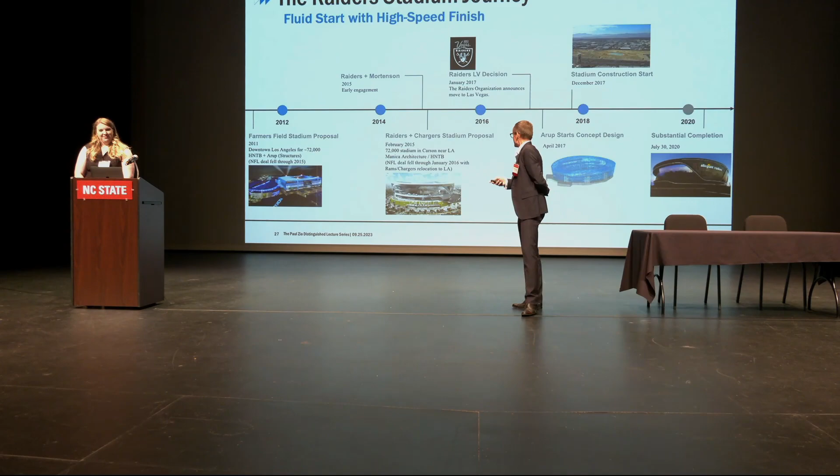A stadium isn't actually built in these 40 months, right? There is a long journey to it, and the journey of the Raiders in Las Vegas actually started in 2011 with the Farmers Field Stadium proposal, which was supposed to be built in downtown Los Angeles, also with 72,000. And that was the first time we got involved with HNTB. And that deal actually fell through in 2015. And then the next steps actually started when Mortenson got involved, Ellen.

Yeah, so there was another idea to move the Raiders to a shared facility with the Chargers, what is now SoFi Stadium, shared between the Rams and the Chargers. And the Raiders organization actually reached out to Mortenson. At the time, we were constructing US Bank Stadium in Minneapolis, Minnesota. And they said, hey, you're our builder of choice. We want you.

At the time, we respectfully declined the opportunity because we just didn't have the capacity. We had a ton of team members engaged in Minneapolis to finish US Bank. We were right in the trenches of the ballpark down in Atlanta for the Braves. And then we were getting ready to start Chase Center, the Golden State Warriors arena out in San Francisco. So the timing just didn't work out. The Raiders were pretty disappointed, but they understood and walked away. And that actually started a beautiful partnership between Mortenson and the Raiders.

And so in 2017, the decision was made, the parcel of land became available, and the NFL owners all met and voted, I believe 31-1, that the Raiders were allowed to move to Las Vegas. And a condition of that move was that the stadium had to be open for the 2020 season, so it had to be ready for preseason games in August of 2020. Fortunately for the Raiders and for Mortenson, our capacity was looking a lot better, and so the partnership was able to continue out in Las Vegas.

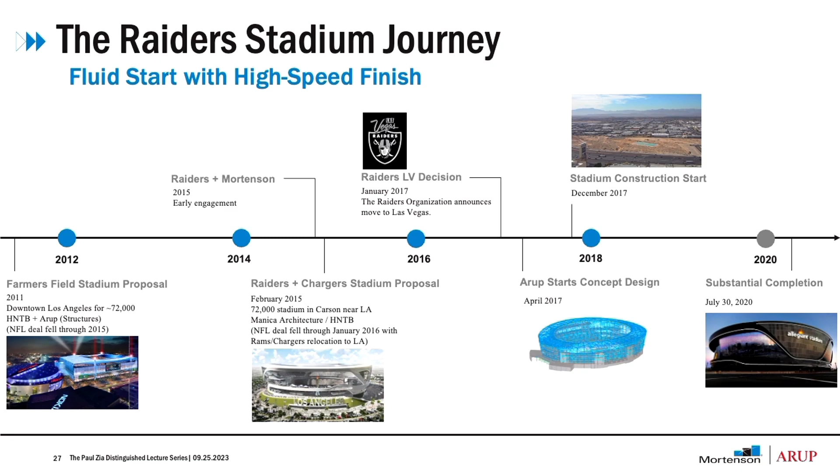All right, so now we'll move on to how did we deliver the stadium? So obviously a stadium of that size, with that fast of a pace, takes a huge team. And so the ownership group was a partnership between the state of Nevada and the Raiders. So that was the Las Vegas Stadco. And then Manica was the concept architect. So Manica came up with all the beautiful renderings that the Raiders organization fell in love with.

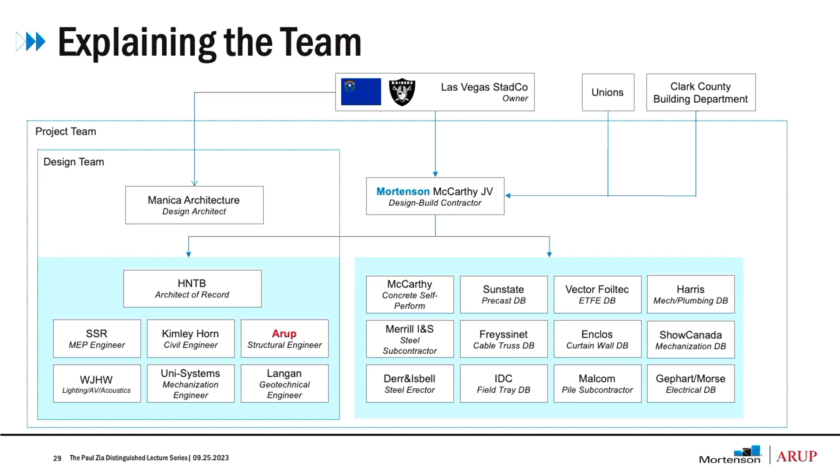Mortenson McCarthy, it was a joint venture, we were hired. And it was a design build delivery structure. So we had the architect and subconsultants under our contract, as well as all of our trade partners to construct the project. HNTB was the architect of record. You can see the other folks on the screen, most notably for today's discussion, Arup, the structural engineer. So we worked hand in hand with Arup, really from that April timeframe all the way through until the very end of construction. And then our trade partners are in the other blue box you can see. So we self-performed concrete on that project.

So a project of this size can only be done with one team, and we needed to be clear on one goal to get to the success. What that means is everything had to be subordinate to these goals, and to understand the background better, you need to understand football is the only revenue stream for the Raiders. So there was either a stadium on July 30th, 2020, or there was no stadium at all.

So that meant simply, yes, you can come up with a scheme, you can come up with an architecture, you can come up with a design, a schedule, anything, but if it doesn't meet the schedule, if it can't be built, if it can't be permitted, if it can't be designed within these 40 months, then it's not the right scheme. You don't have a project. And you can see the design schedule is extremely compressed, with only 12 months from start to 100% CD, and then also we had to work closely with the permitting agency.

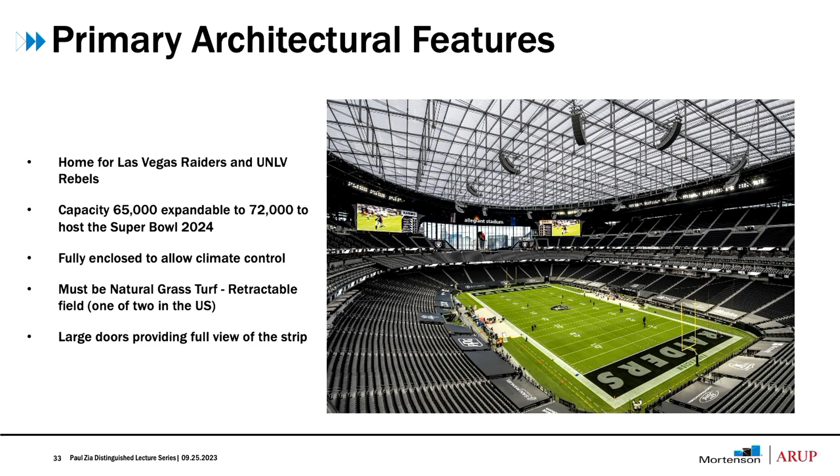And then the other big must-have were the lanai doors, as they were called during construction. So a series of 4 operable and 2 fixed doors that were 50 feet wide and 80 feet tall, that when the weather was nice, allowed you to open up to get just beautiful views of the strip. And so that was another must-have. So Frank and the team rolled up their sleeves and got to work.

Okay, so how did we make the stadium designable? So, the usual suspects, starting off: design repetition, typical floors, a limited number of connection types. Also, maybe I should mention here, we as Arup, as structural engineer of record on the West Coast, we designed all the connections from 100% CD. I guess it's different than what is typically done here.

So limiting the number of connections also helps, because it limits your design time. And then a large number of the connections were also capacity designed, and that is also a balance between efficiency in the design versus making it efficient to build and efficient for changes. Because if something changes, you have extra capacity in your connection. You don't have to redesign. You can make on-site changes quicker.

And then for people with seismic backgrounds, we selected a balanced seismic force resisting system, SFRS, with an R equals 3. Some of you may think, oh, R equals 3, why did you choose something relatively low, meaning you have fairly high design forces? The reason is because we were able to get around seismic requirements on the members and the connection design.

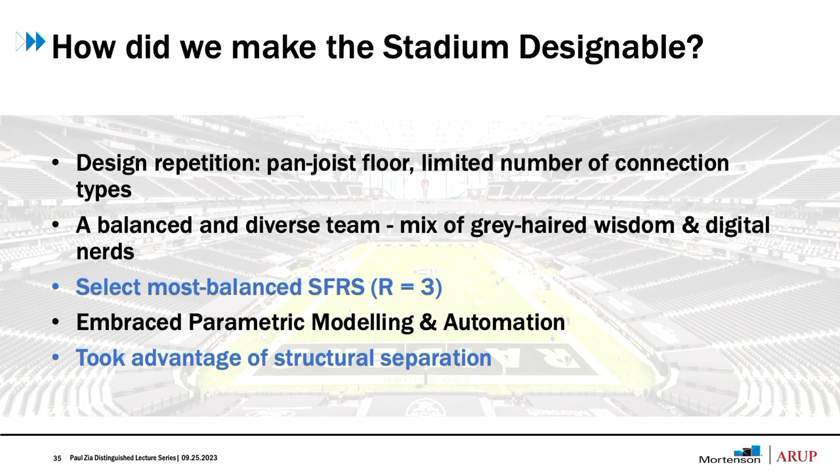And then, structural separation. There were numerous iterations in collaboration with Mortenson McCarthy in the beginning. How are we going to separate it? Where are the movement joints going to be? And that also helped us with the design process, because as you can imagine, if you need to overlap design, you need to be analyzing structures separately at the same time.

And then you have 4 separate bowl structures with double structure movement joints. So what that means is, you have a concrete plinth which is connected only at the foundation level, and then you have a movement joint through the steel and through the lower concrete structure.

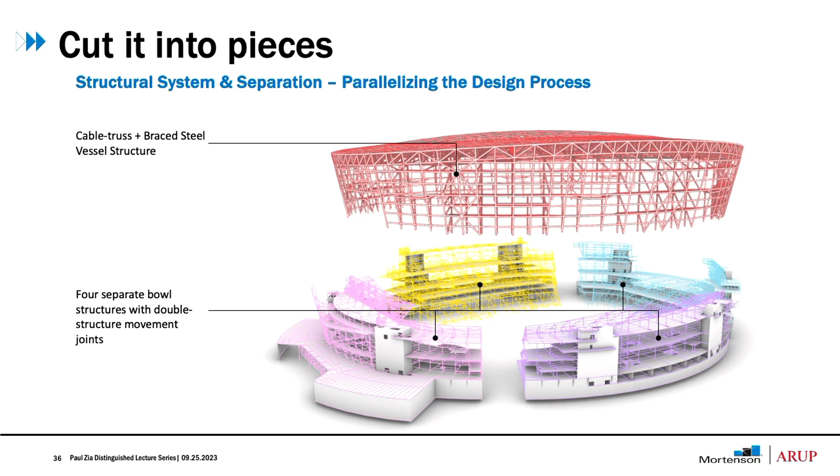Okay, so as I already mentioned, we used a steel system not specifically detailed for seismic resistance. That doesn't mean anything bad, right? It just means you need to assume a higher seismic force. You're only allowed to assume a certain level of ductility, as opposed to, let's say, an R=8 system.

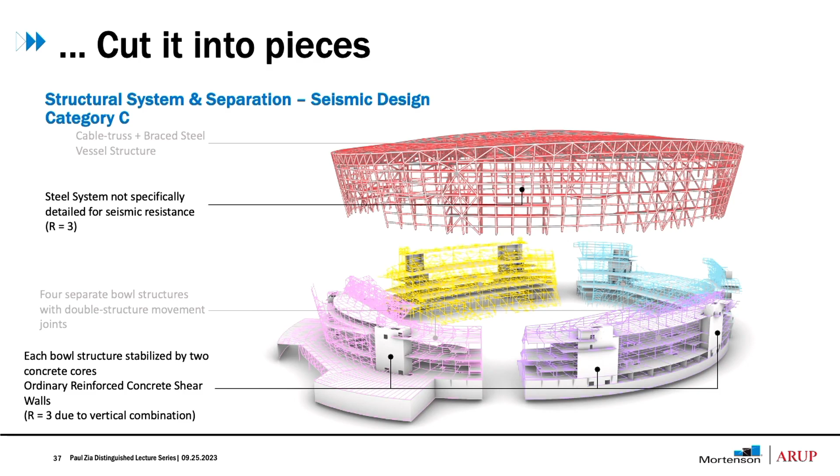And then because we had a vertical combination, these reinforced concrete cores were designed as ordinary reinforced concrete shear walls, also R=3. And because they were ordinary, here too we were able to reduce the detailing requirements to an acceptable, constructible level.

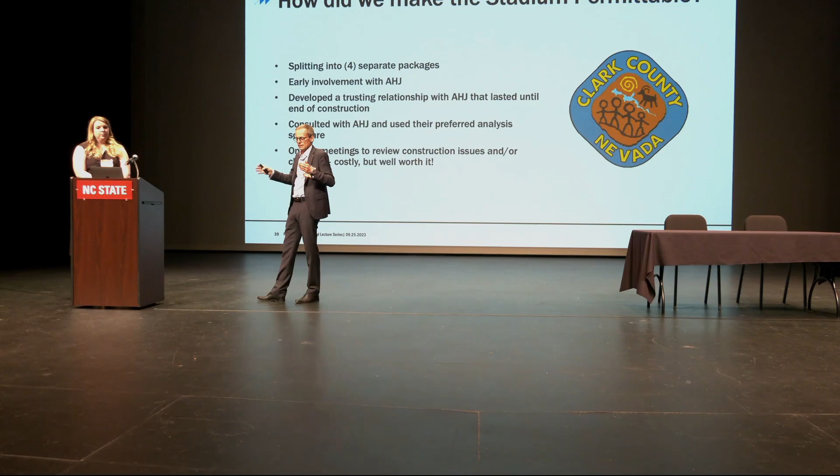Okay, so I was already talking about the importance of parallelizing the different work streams, and that also meant we had to work with the local authority, Clark County, to help them get it permitted in a time frame acceptable to our client. As we mentioned in the very beginning, you can't finish the design and then start constructing. You need to start constructing significantly earlier. So we needed not just 1, but 4

separate packages. And it's not that you just walk in and tell Clark County, hey, we're coming tomorrow and giving you a set of plans. It was a long process. In probably one of the first meetings we spoke to them and got their feedback and input on how we can do this the quickest way possible. And that actually helped us build a very good working relationship with them.

Because if you paid close attention, you probably noticed that the ultimate owner is the State of Nevada, which, in some sense, is sitting above Clark County, right? So on one hand they're the owner, and on the other hand they're giving you a permit.

So there were these competing interests. We're saying, hey, why does it take so long to review the structure? And on the other hand, you need to do a good job, you need to be diligent, it needs to be absolutely safe. And the other thing was, we are a large engineering company. We have our own software. We have our own way of doing things often. But that way of doing things often doesn't line up with how AHJs, like Clark County, do things.

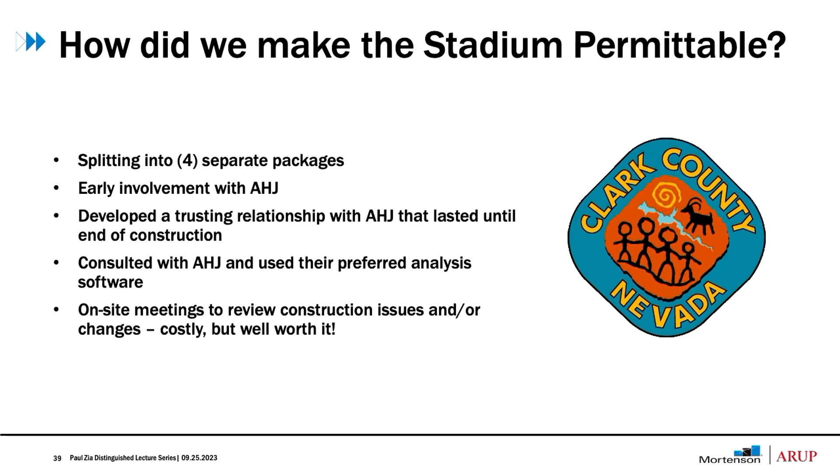So we asked them, how would you like us to submit the documents? What software would you like to have it in? And of course, they used the software which we didn't have or didn't use in the beginning, which meant we had to change horses, not halfway through, but early on. But that also helped them to verify and take a look at our models in software familiar to them, and that helped build the trust with them. And then regular on-site meetings during the construction was another key point I wanted to add here.

Okay. Yes, so how did we divide the permits up? We divided the permits up in the way that made sense for construction, but probably not in the way that Frank would have preferred from a design standpoint. So our first permit package was our foundations package. We got that package and got going right away. While we were doing foundations, Frank and the team were working on our lower and upper concrete bowl. And so at any given time, I think we were about 3 months ahead from design to construction.

So not a ton of time for design change error, AHJs deciding they wanted something different. So we as a team made the decision to have the first 2 levels of the building be constructed in cast-in-place concrete, because that would give us time for our steel detailing and procurement. And so once we got to our main concourse level, which is the level most folks walk in on at Allegiant, we switched to an all steel structure, and the steel superstructure was the last permit package that we had.

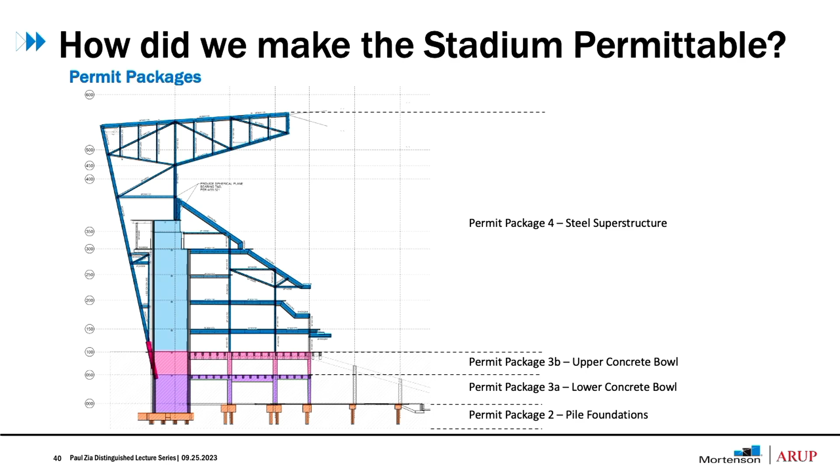Okay, and how did we make it constructible? We had to focus on engaging the trade partners that could perform with us as early as possible to make sure that we were hand in hand with our subject matter experts to make the best decisions for the project. So we really tried to make decisions backed by data, either cost or schedule. We kept those customer absolutes I talked about earlier at the forefront of our mind, but there were a lot of decisions that had to get made very quickly.

I would say the pro and challenge of design build is the contractor having the design team under our umbrella. It allows a ton more collaboration for those types of decisions, because the owner isn't as involved necessarily, as long as you're achieving the right design outcome for them. But it does offer opportunity for a little bit more disagreement or back and forth there in the beginning.

We embraced common tools. We'll have a whole section on this, but it was really critical to come up with a BIM execution strategy that everybody could live with and thrive in. And so we used Tekla for steel, and then converted to a Revit, Navisworks, Revizto kind of combo at the follow-on trades. And we utilized continuous quantity tracking. We really tried hard where we could to get a repetitive design so that our folks in the field could get good at a few things and repeat and drive up productivity and limit the surprises.

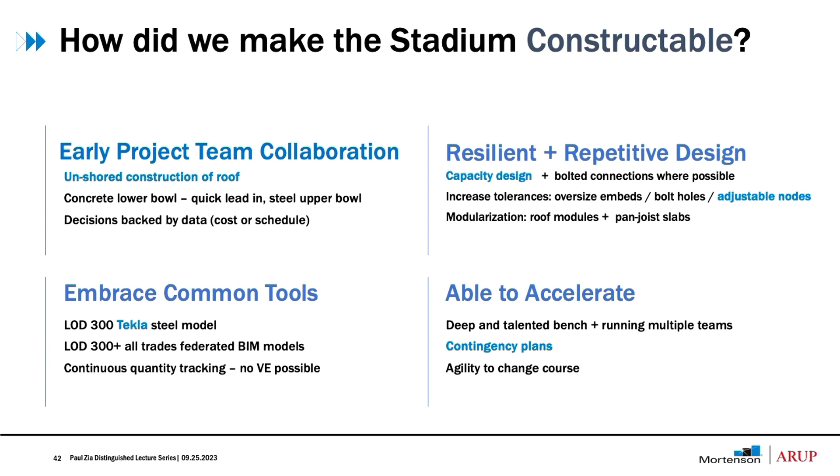By using a shared Tekla model, we were able to cut significant time out of the schedule. But also this one, no VE possible, right? If you look at a normal project, you do design, and your cost estimator or the contractor which is on board does some cost estimating, comes back two weeks later and says, oh, it's too much. And then you go back to the drawing board and change things. That wasn't possible, because it was almost like a train; you can't change lanes. You only had one direction to go.

So that's why we had continuous quantity tracking, which meant that we pulled out steel tonnages from our documentation models on a daily basis and plotted these on a graph. It also gave us an inherent quality assurance process, because if there was suddenly a spike, either there was a big change, or if there wasn't a big change, there was an error somewhere. By doing that, we were able to stay on track and avoid any VE. Okay.

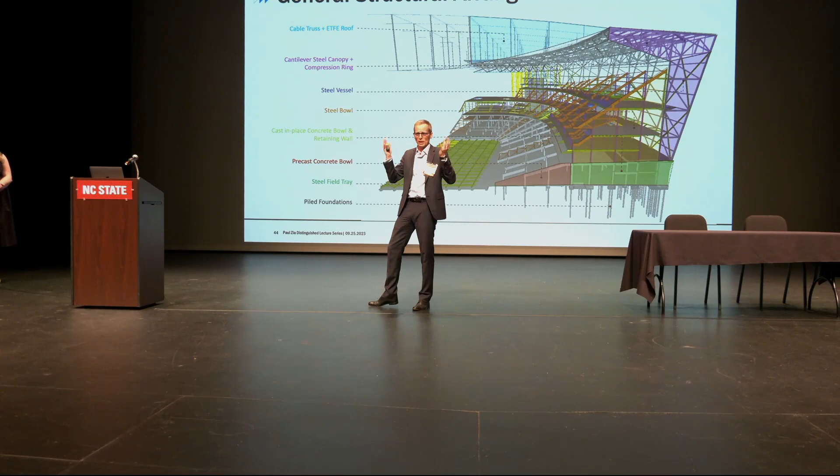So the general structural arrangement. The roof is built up of a cable truss and an ETFE roof, which sits just above the cable truss, which spans between a cantilevered steel canopy, which cantilevers from the back and forms a compression ring. It's kind of an eggshell thing. Sometimes it's hard to imagine why this thing is under compression. Just think of a tennis racket: you put some strings in between, you pull, and you see this thing is actually in compression.

And then what we call the steel vessel on the outside, which formed the skin structure, the braced frame structure, which is also the steel bowl. And then we have the cast-in-place concrete bowl and the retaining wall, the precast concrete bowl, and then the field tray and pile foundations.

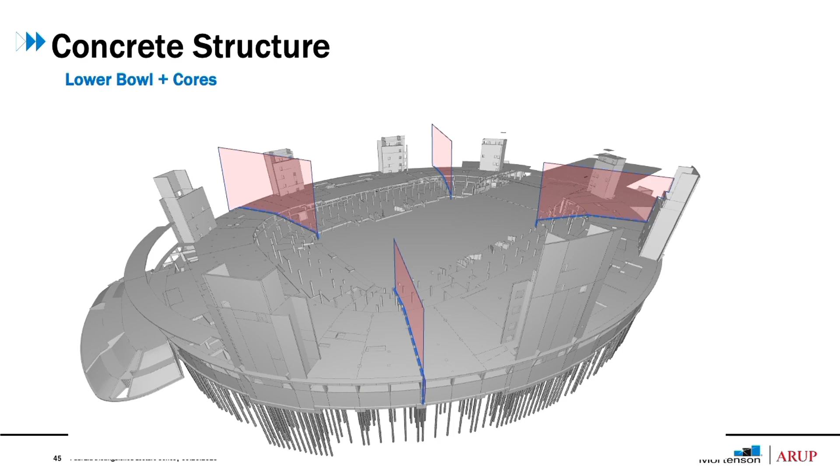Okay, so now let's talk about the lower bowl and the concrete cores. This is the 3D Revit concrete model, and what you see here in red and blue are the movement joints in between them. You can see each segment has two concrete cores to provide the stability system for the bowl steel structure.

Okay, so foundations. It's a piled foundation. The ground is actually quite good. However, from an excavation perspective it is difficult, because most sites in Las Vegas feature a super hard caliche layer, and depending on where you are in Las Vegas, you are not able to excavate it with mechanical equipment anymore. So excavation had to start early, and it was done with explosives. Was it on a daily basis, Ellen, when you blasted this out? So it had to be blasted out.

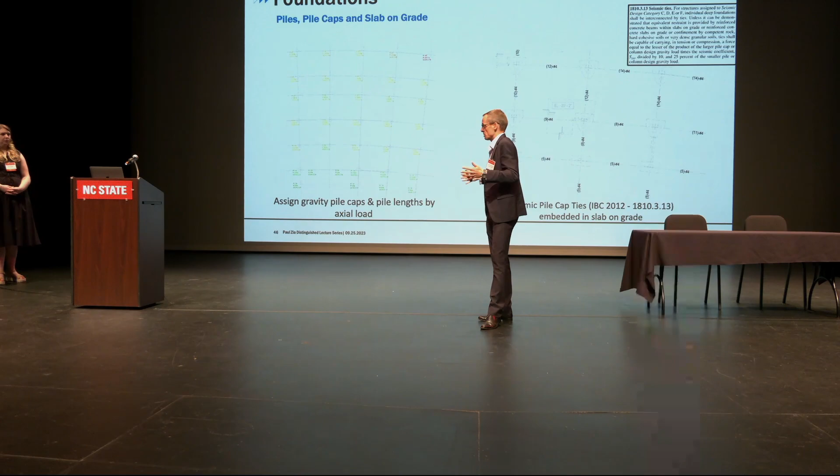Shortly after, once we received the permit for the foundations, we put in piles, and these were auger cast piles. Simply because of the scale, the number of piles we had, auger cast piles are just qualitatively the better pile, and through the large number you get good repetition, and that's why it's typically the most efficient pile system for such a structure.

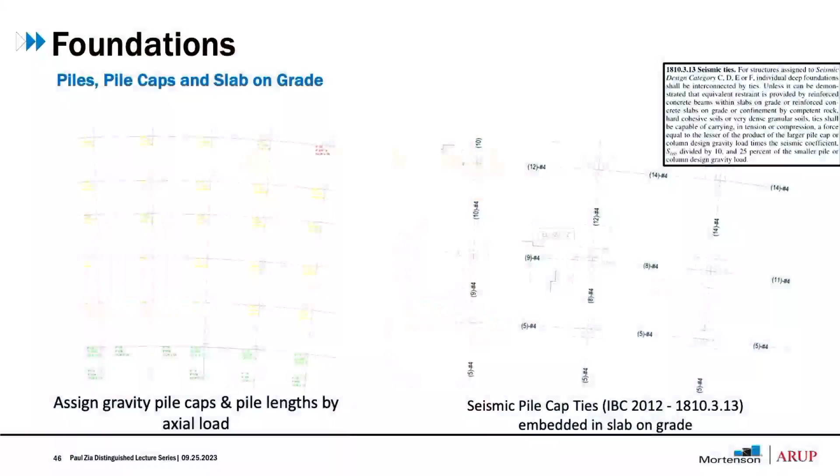One other thing was, and I don't know if we wanted to get greedy or just try to optimize it, we said, okay, we do a test pile at each segment, and based on the capacity of the test pile, we may adjust the number of piles. Which meant we still had to adjust the foundations. As you can imagine, your testing is not that far ahead, and you still need to go through county approvals and other things, so it was quite stressful and very difficult when the values didn't quite come up. So in hindsight it was maybe not the best idea. We should have maybe just started with the values of the first test pile.

But one thing I wanted to show here, and you will see this through the entire presentation, are outputs from our design, and it's not analysis software. These are custom-written tools which help us to visualize design data and track and control DCRs and so forth.

Because imagine piling was going on whilst we were still designing the building, right? So we continuously had to check the pile forces, that we do not exceed what's already in the ground. And then on the right-hand side, just want to make the point, wherever we could and we were allowed by code, we were using the slab on grade to tie these together for code.

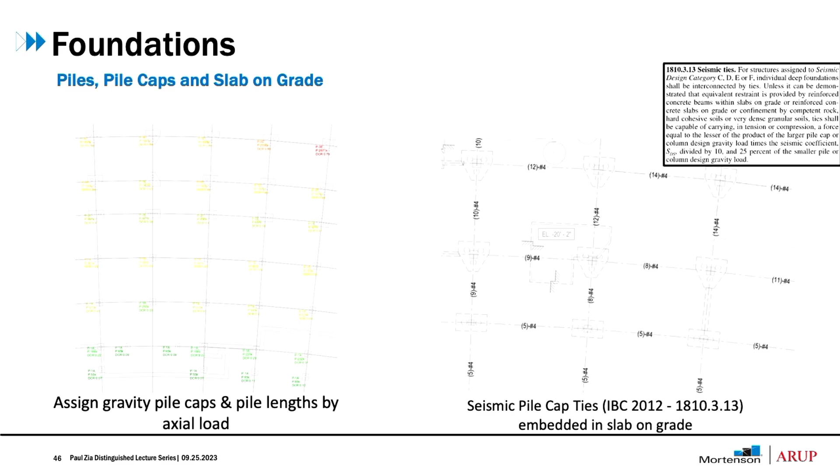And common practice is to use the maximum column force at the maximum location and put the same reinforcing everywhere. But then you are super conservative. We used scripts, and within 2 days, 1 day to calculate it out, another day to do QA and other things, we were able to optimize the reinforcing in the slab down.

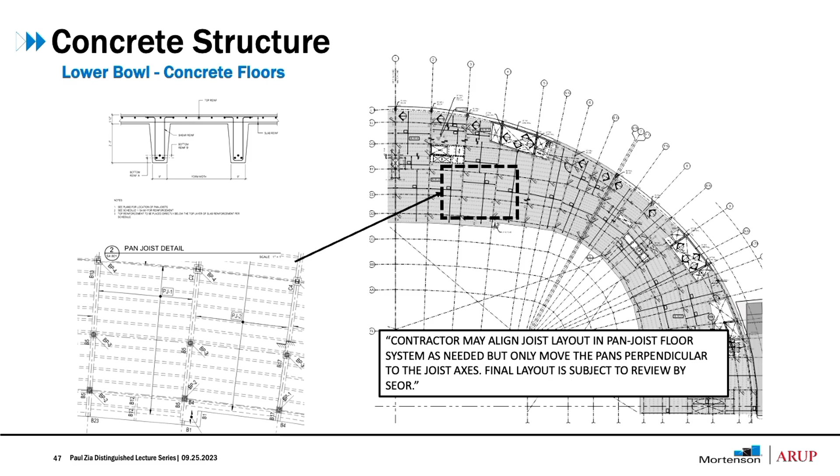Okay, so this is the lower bowl structure, the concrete floors, in collaboration with Ellen's team, who self-performed the concrete. It was cast-in-place double T slabs, and this is just an example. But as you can see, we try to give the contractor as much flexibility as possible to allow them to adjust it wherever needed, so we can reach the maximum efficiency. Right?

So there was no steel cast into the concrete, and that's how we sized the concrete wall as well. So we had these bars, and then we had some confinement reinforcing around it, and it was fairly narrow columns for seismic conditions, right? And that was also done because we knew that we don't want to pull the steel procurement process forward, because who has a W14 by 700 or whatever the size was laying around? Not a lot of people, right?

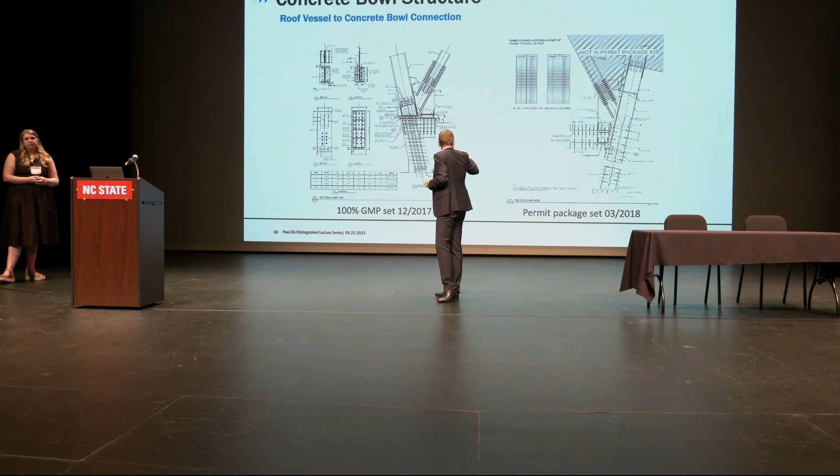So, but when the permit package, just after, maybe a month or so later, a new steel contractor came on board, and as the story goes, they had these columns laying around. And so in a moment of weakness, we said yeah, great idea, let's use the column and bring it into the concrete and cast it in, right?

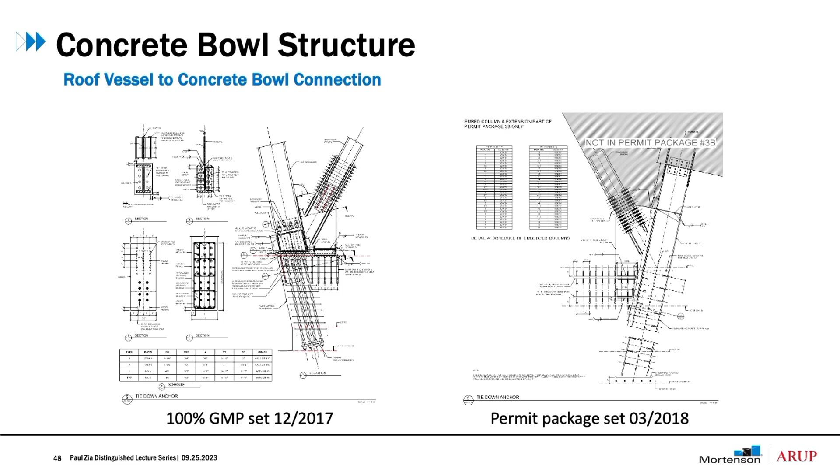In hindsight, it wasn't a great decision because now we couldn't change the wall thickness anymore. And then we struggled really hard to get the concrete in there, and we had to bring the rebar through the steel, and it took us a lot of 3D modeling of that connection to actually achieve what we wanted to achieve. So I guess the lesson learned here is, think it through before you make a decision, right, on this one.

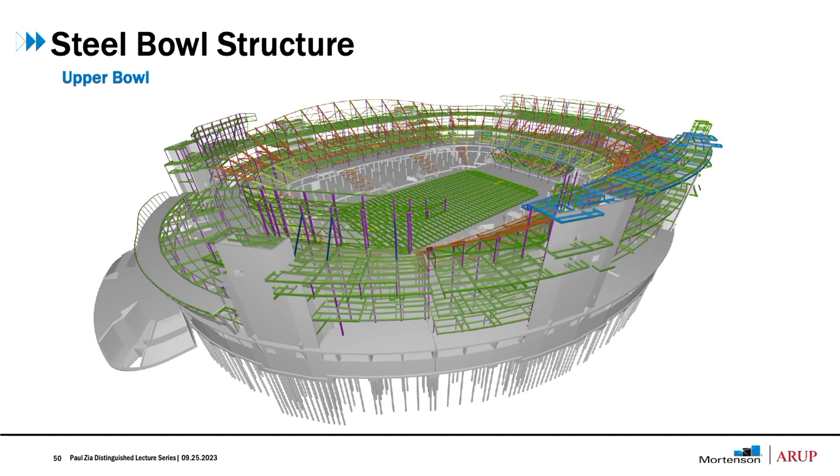Okay, so upper bowl structure. So, as mentioned, this is a steel structure, which is supported laterally by these ordinary concrete shear walls, as you can see. So fairly standard. You can also see some of these, actually 3 scoreboards, which was a problem in itself, because as usual, scoreboards are done last, but you needed to have the supports in, you needed to have a structure in, you needed to have some steel in, and then when Mortenson said go, we had to design it very, very quickly.

Okay, so this is the steel bowl structure. So there were 3 main concourse levels, and then this one here, which you see in this, I guess, salmon color, is a steel composite framing, which created the diaphragm for the horizontal elements, which tied them back to the concrete cores. And those were lightweight concrete, just to lower the foundation loads.

But now this is an interesting and very important detail, as you can see. The raker beams are steel, but then the terraces were precast. So if you want to save money and make it structurally most efficient, you would use these precast panels as a diaphragm. And it's often done, but the problem then is you need a temporary system to stabilize your steel during construction, which you then have to remove later on.

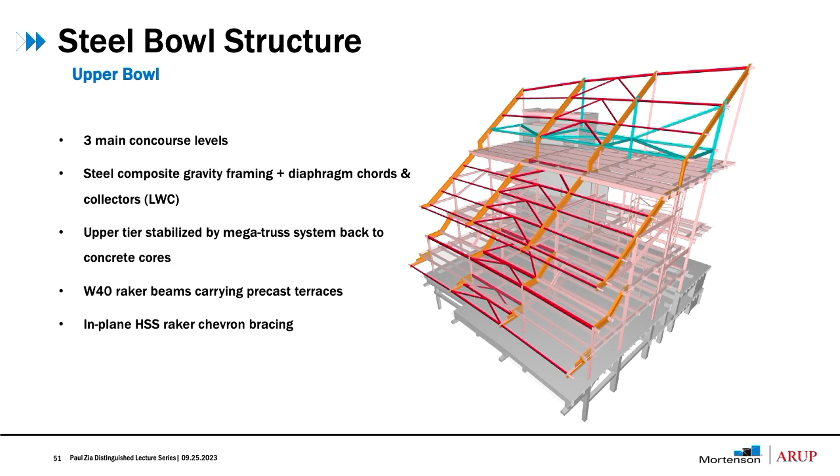And typically your connection to the precast is more complicated and needs to be done afterwards. So by putting these in, you spend more money on the permanent steel, but ultimately you speed up your process and ultimately save money, and that's why we chose it.

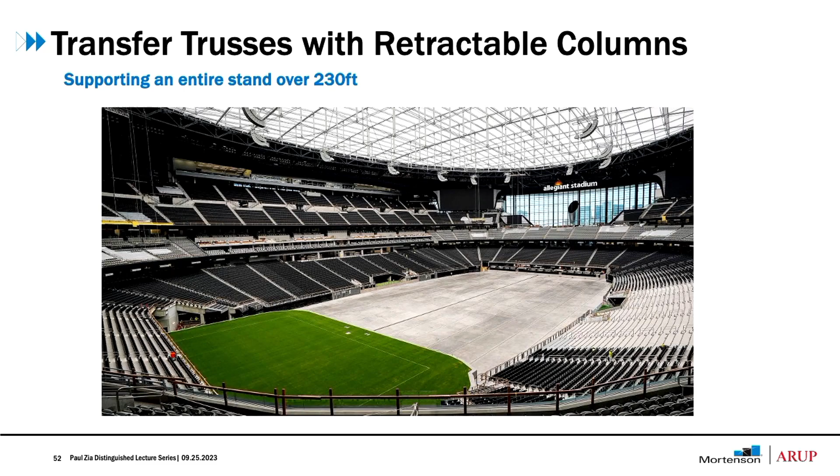Okay, so then you see the grass retractable field on its way out, and we needed a 230 foot opening, 60 foot tall, and some people see these columns here. They had to go away, of course, because when the field runs through, you can't have any columns.

So what we've done was, we wrote our basis of design, and then we spoke to Clark County and said, no problem. When the columns are not there, there aren't any people on it, so zero live load, likely. And then Clark County said, how sure are you that there are no loads on it, no people on it? And then they made us design for it.

So the answer then was, okay, we put these columns in, make them retractable, and actually also wrote them an operations manual to make sure that, number one, when the columns are down, the field cannot be rolled out, of course. Number two is the stands have to be completely empty when you fold them up. And then number three is just in case, for whatever reason, you don't have the columns down and people are in there.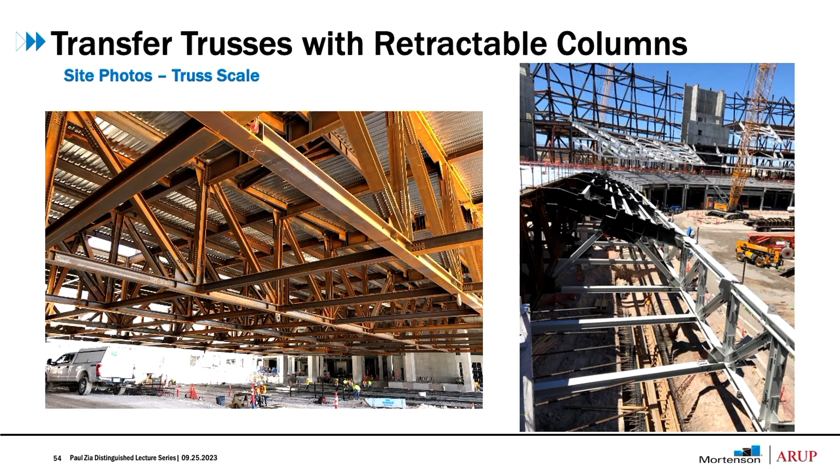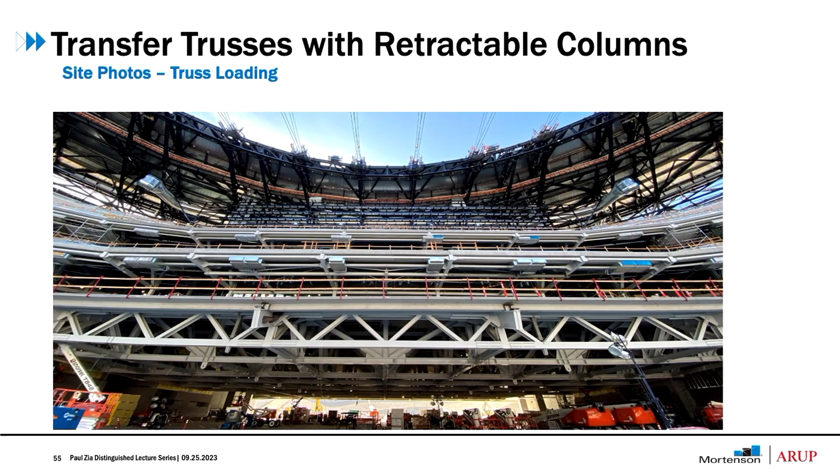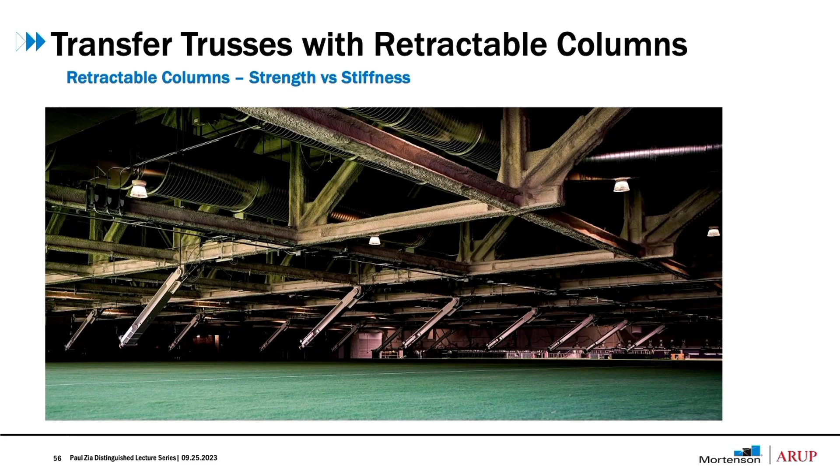Yeah, and then I don't know if you can make out these little brackets. This is where the retractable columns attach to. Okay, and this is how the retractable columns look halfway up, and then you can also see here there's a hydraulic jack, which, once they're down, of course not when the field is there, engages the truss into place.

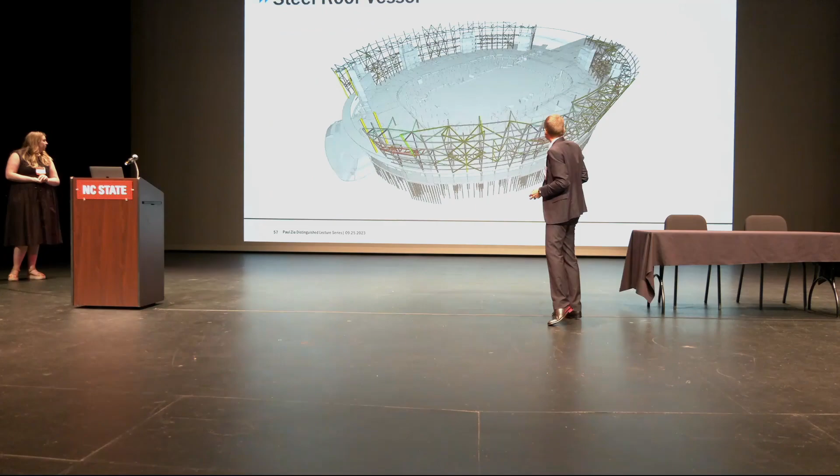Okay, so the vessel structure, as you can see, the braced frame structure, stability system. So now with the full canopy on top, and then you can see the spans over the openings here and there.

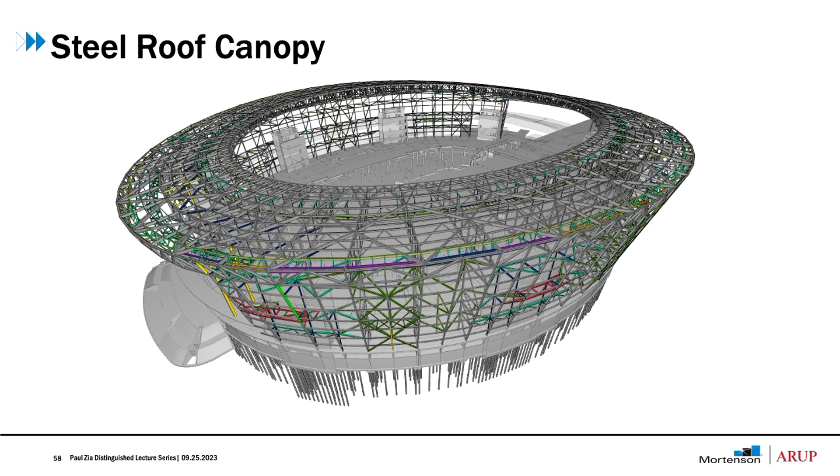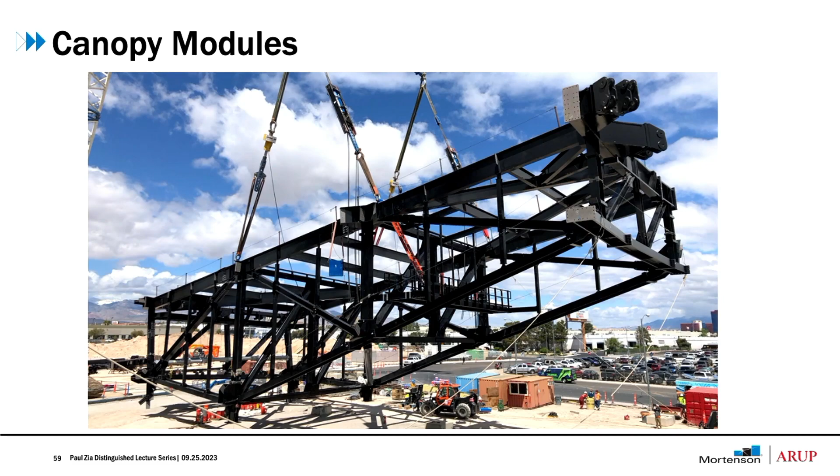And then, of course, erection. There was no time for supported erection, because whilst Mortenson erected the roof, they were doing other things in the bowl. So everything had to be done cantilevered. So besides the permanent condition, the entire design construction team had to do an erection model to take into account the additional forces induced and the additional checks required for the temporary conditions.

And the concept was that alternating modules were erected, and then infill pieces were filled in. Okay, and then some images to that. You can see here one of these trusses being erected.

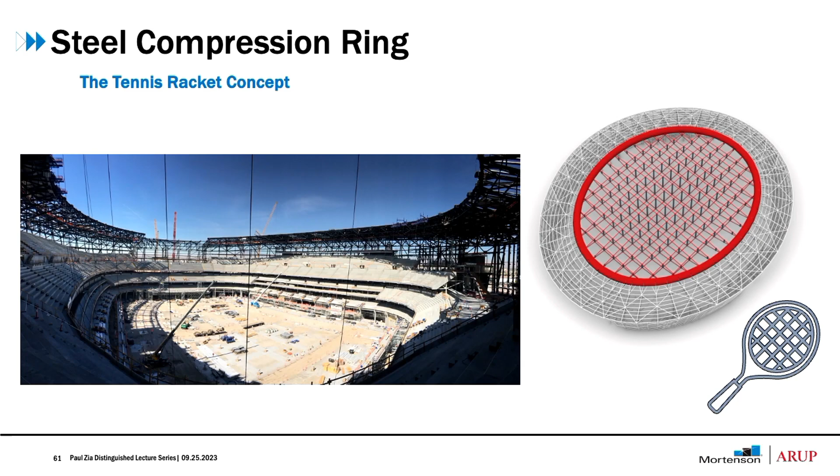Okay, so you have these spacers of different height, and by varying the height, you were able to create the geometry of the roof. And you can see double cables, top and bottom, in each direction.

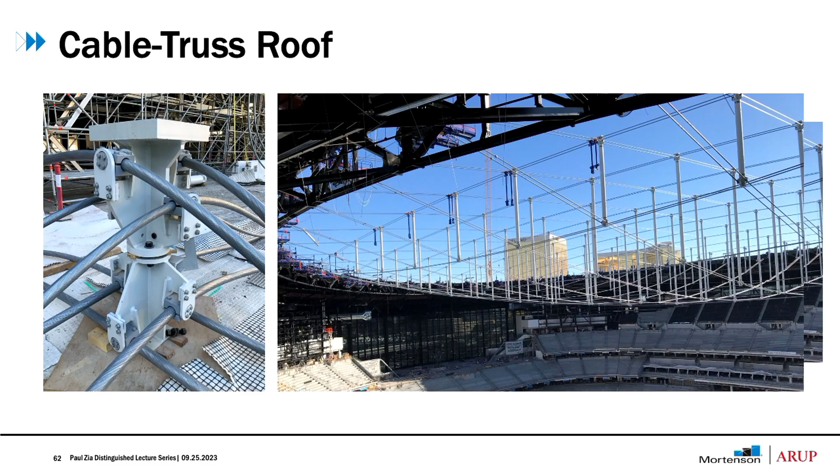Okay, so I really like this picture on the left because it shows you the scale. So this is Greg, one of the main designers of it. You can see how big this thing is, right? And then this is the top chord of the compression ring. This is the bottom chord of the compression ring, right? And then here, this is also something which we were very proud of.

So these cables, they're not small cables. They were like 4 inches in diameter. They're big, and they're cut to length. They come to site. You can't just say, hey, the compression ring doesn't fit quite, can you make them a few inches longer or shorter? It doesn't work like that. And typically what's done is actually 3 options.

Either you fabricate the compression ring to a much higher standard, and even if you did do that, you still are at the risk of having to adjust things on site. Second thing is you have turnbuckles in there, which you can adjust length, but often that's not wanted architecturally. And then we came up with this one because architects do not like other things in there.

And with this one, we were able to reduce the required tolerances of that compression ring and reduce the cost, but also give Mortenson McCarthy the flexibility to change things on site if things just didn't fit quite as much.

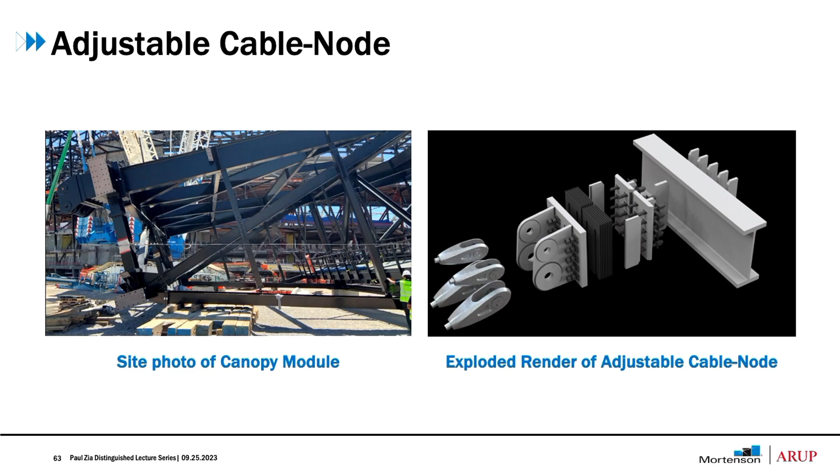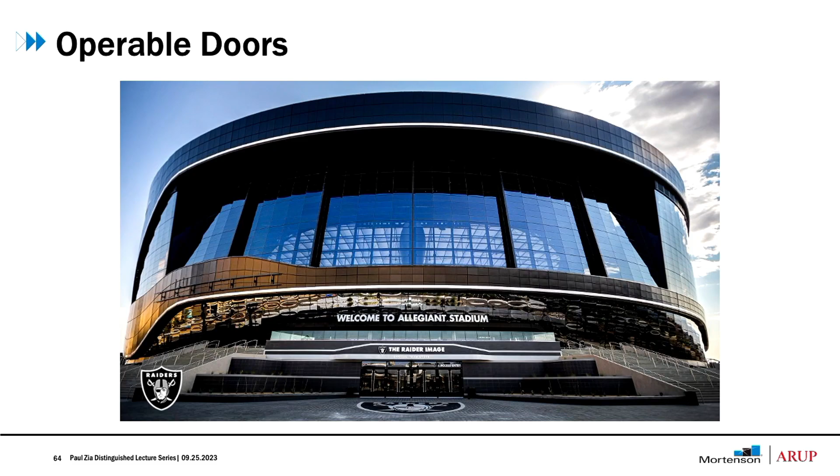Okay, operable doors. So the operable doors were actually installed by our curtain wall contractor. And so we had a very tight structural threshold with our crane. So pretty proud of these doors. We only had 5 inches clearance between the tip of the crane and the top of the door and structure. And so we were able to prefabricate these on the ground and then swing them into place. It all went fairly flawlessly.

They're electrically controlled. And so for the first time in my career, the very first time we pressed the on button, the doors actually opened. So we were very excited here, on a stadium where we had not very much time to troubleshoot errors.

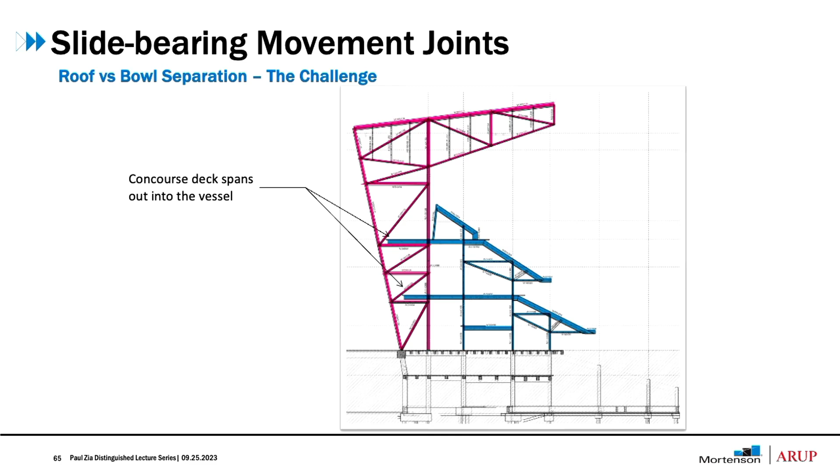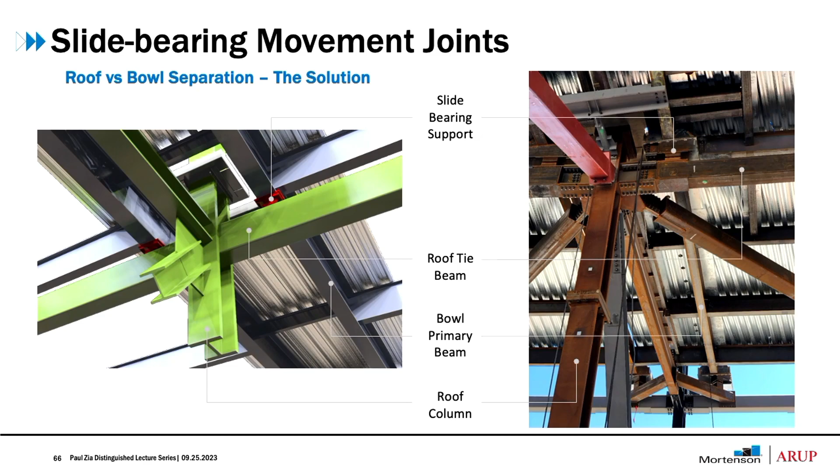Okay, so I think I mentioned there's the vessel structure, there's the internal structure, so they needed some slide bearing. And another thing we were really happy with: this is how we thought it's going to look, and this is how it actually ended up looking. Of course we didn't model all the connections in there, but you can see it's similar, right?

Okay, so normally when we give a presentation which is significantly more focused on structural and automation, we go into significantly more detail. But what we've used on this project is a database-driven approach, and what that means is we make sure everybody works with the same data. We pull out geometry information, design data, and pull it into a database.

So meaning, you have a database for your overall geometry from your Tekla model. It's pulled into a database that can then be pulled into the analysis software, and you can run the analysis with that. At the same time, you can pull out the analysis results into that database, and then use any software pretty much everybody knows to visualize things. And this is just an example.

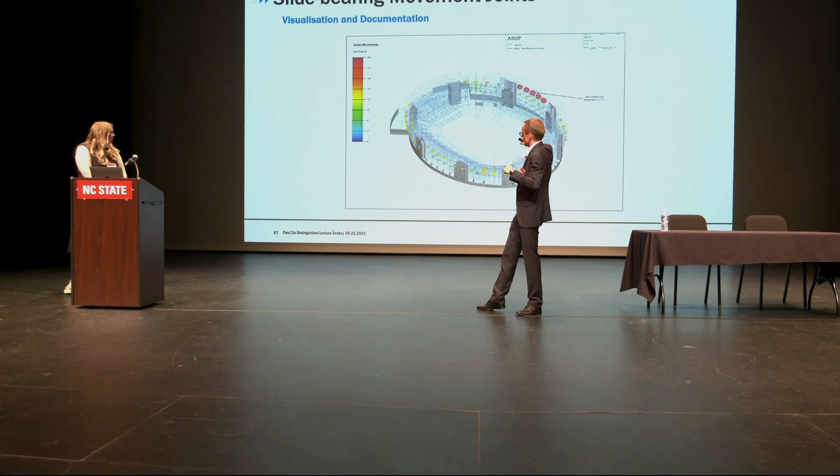For example, hey, show me the movement between these joints. And as you can see, these are actually 5 computer models pulled into one, which is difficult to do if you have 5 different models, sometimes at different stages. But this shows the power of this approach, right?

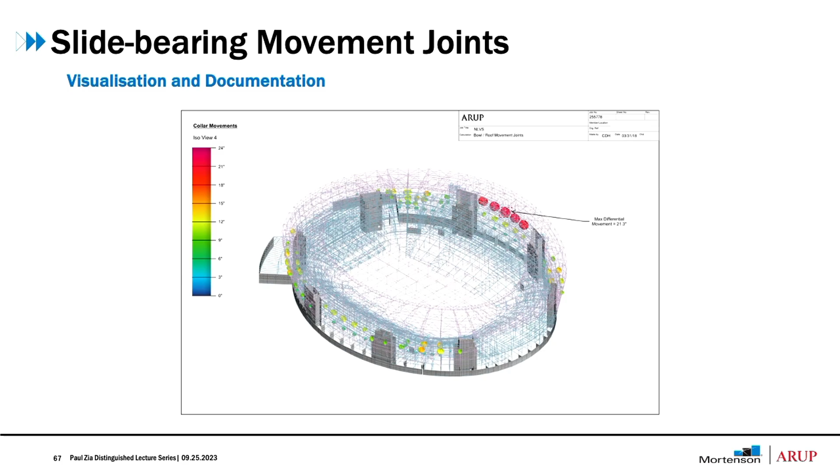Okay, digital design and BIM. So the next 20 minutes we're going to talk mainly about BIM. Digital design is a bit shortened just for the sake of time. But I think the BIM portion was probably the most critical thing on the project.

Okay, so the eternal question is, or was, I think we answered it, architect's or steel fabricator's software. So people in the industry are probably familiar with Autodesk Revit. It's the common program to document building structures these days, and it's a good tool for what it does. It's good for consultant coordination. It's good for concrete documentation, and it's great for interface with other disciplines.

On the other hand, there's a tool which is better for steel. And 99% of all steel contractors and detailers use a software called Tekla Structures, which is owned by Trimble. So at the time when we started this project, these two didn't really talk to each other well. So the question really was, okay, are we using the architect software for steel? Well, the architect told us, hey guys, you're using Revit, right?

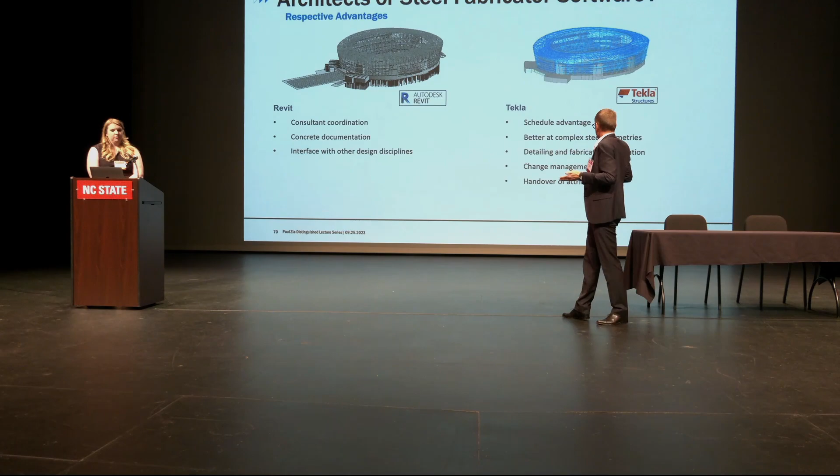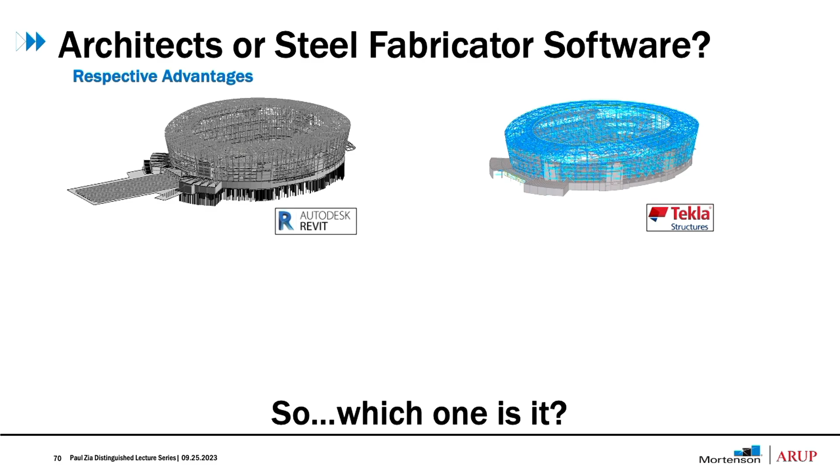So now the question is, what do you do for the coordination and documentation? The schedule is the answer, what I just told you. In order to make this work, what I showed you in the beginning of the process, we needed these 3 months. That was only possible by cutting out a 3-month model creation on the detailing side, and that's how we did it. We built a level of development 300 model in Tekla at Arup.

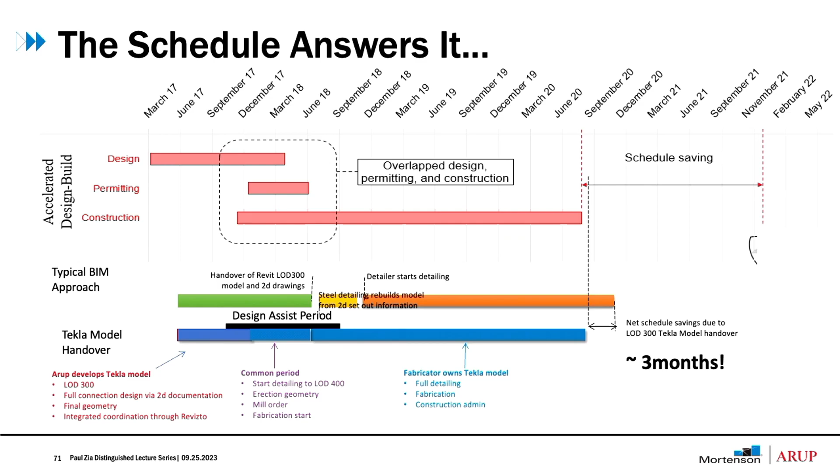And then we had a handover period where we sat with the steel contractor and discussed how do you want to have it built? Mill order, what do you want to have in the attributes, which data do you want to exchange and other things, and then we handed it over to the contractor, to the fabricator. And that saved 3 months, right?

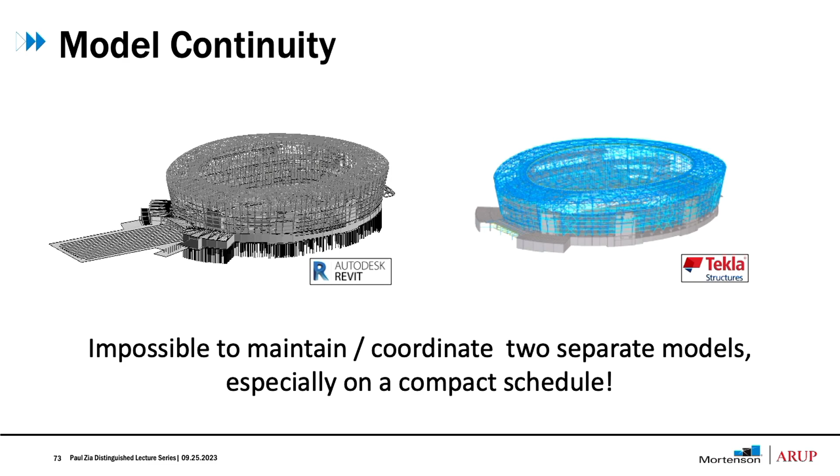But how did we deal with the coordination, the architectural side of things? It's impossible to maintain these 2 models, because it's just like, did you update it here? No, I forgot. Please, will you update? On such a compact schedule, it's just not possible. You have to go back to 2017; now it's 2023 and there are other tools out there which make them talk to each other. But it was fairly new at that time, and we had delivered projects with our approach before, and we wanted to make sure that what we have works and we can troubleshoot it ourselves.

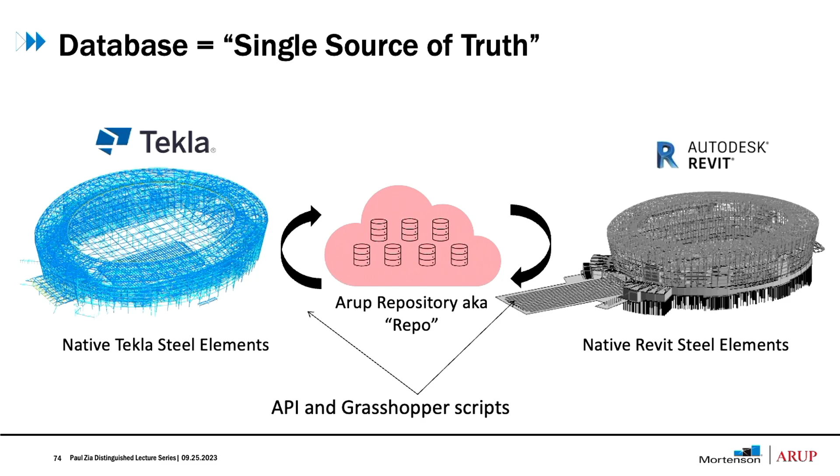So we used our tool, which we call Arup repository, aka repo, and it's very simple. You build something in Tekla. It's not simple, it's a stadium. And then you read it out into a database. That's the repo, with tools using API and Grasshopper scripts and other things. And that is what we like to call the single source of truth, the geometry. Then you use this to build a native Revit model out of this data. And because it's based on the same database, it's the same.

The architect did know that we were doing this, but they didn't see it, because they were seeing a complete and native Revit model. By doing that, we could give them the best of both worlds. We give the steel contractor the steel model and give the architect the coordination model.

All right, so Frank explained how the steel process went, and I'm going to attempt to summarize this graphic on the screen for how everyone else integrated into our BIM execution plan. We made the decision early on that Revit was going to be the platform for the project for everyone else. That's fairly common now, I would say. In 2017, it was not as common. By getting our trade partners on board early as they were drawing their content straight into Revit, the design team was able to sync in the cloud and pull our trade partner drawn content into what ultimately would be the construction documents.

So we were able to streamline that from what's typical, where the design team would draw the concept drawings and then the trade partner would go and recreate that in our construction modeling. So you can see the little Revit icon up there. And from Revit, every single day, we pushed to Navisworks.

And so Navisworks is the platform for clash detection. And so that's where our trade partners were managing models and seeing the clash reports. That's fairly standard in the industry, has been that way for years. But we introduced a follow-on piece at the Allegiant project, which is the use of Revizto. So Revizto at the time was an emerging technology, pretty widespread now.

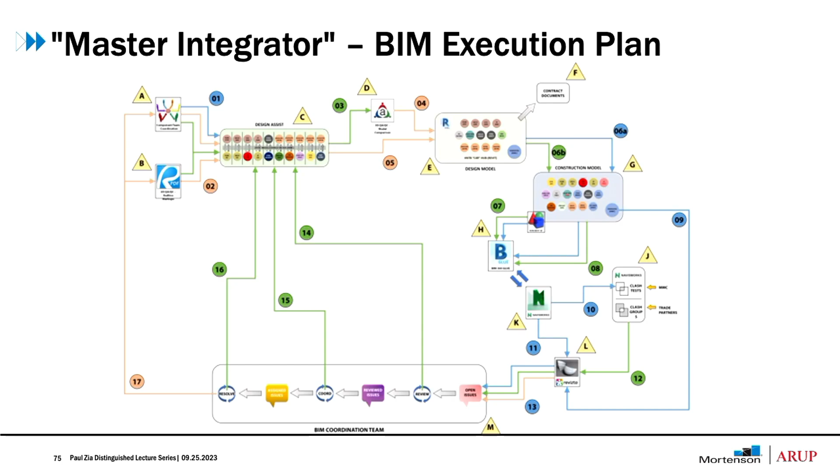And so this piece really just speaks to cutting out the waste. So we cut out the design team produced drawings from a non-structural standpoint by sharing all of our models up to the cloud. I want to say 2017 was really when the cloud was becoming widespread, and so now I think it's pretty common. Everybody probably uses it, but... Yep.

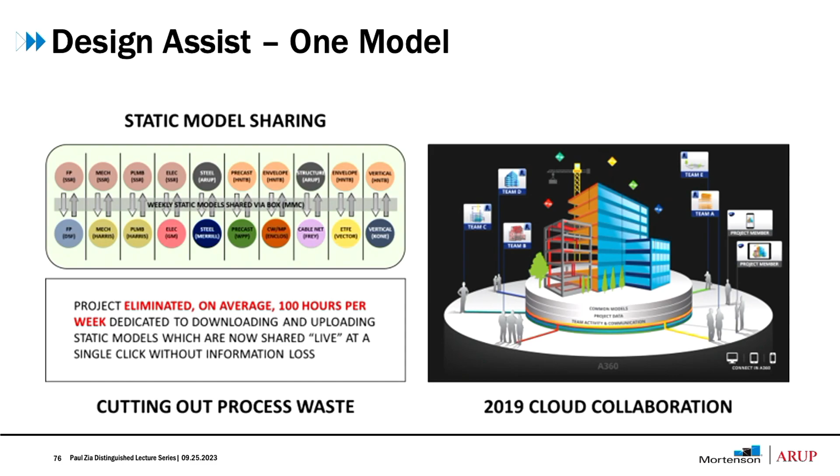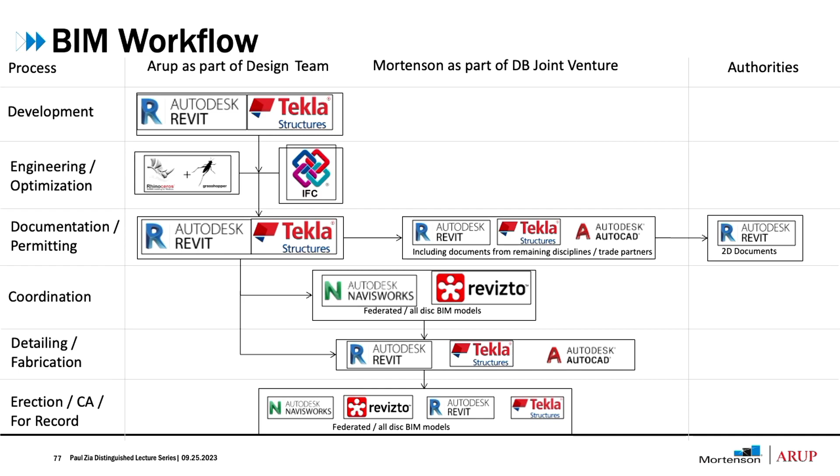So now we'll shift gears and speak specifically to the construction and a few challenges that we had. So necessity drives innovation. I would say that when we first sat down and scheduled this project out, it was not a 31-month time frame for construction. And so we had to come up with some pretty aggressive and bold strategies in order to achieve the construction milestones that were necessary to be able to open by July 30th of 2020.

So our GMP was established in 2018, and right away mass excavation began. So our original plan was kind of a traditional excavation approach, and right away the soils report that we had received was off a little bit on how much caliche was in the soil, and we actually had significantly thicker bands running in a majority of the site, so we had to take a detour and go to the blasting approach. We then moved into our slab on grade construction and our concrete pan and joist construction to pave the way to start steel erection in, I believe, September of 2018.

So we had just a hair under a year of steel construction. It was a 28,500 ton job. So multiple crews working in two different ways around the bowl in order to facilitate that. And then ultimately we got to our roof canopy, which prepared us for our cable net, what we like to call the big lift. Do you want to talk about the big lift?

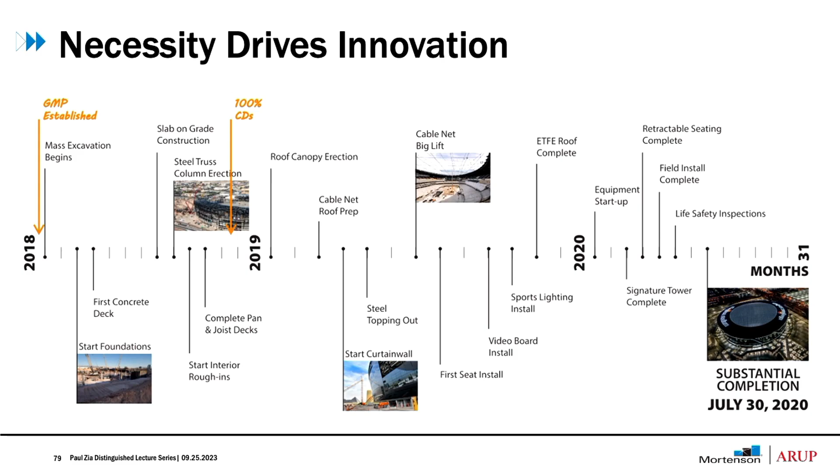But with this schedule, there was no time for that, and that's why the adjustable node connections also helped to achieve that, and helped everybody stay on track. Yeah. Our original schedule contemplated waiting until steel was all the way complete to start curtain wall, but once we had that original schedule, we had to find a way to start faster.

So we worked with Arup. We kind of optimized the curtain wall connections in the ideal load case scenario, and we're able to start the lower level of curtain wall ahead of finishing structural steel. And then ultimately kind of moving into 2020 and on to completion, it was your interior finishes, seating bowl, all of that good stuff to really transform it into a stadium.

There was an existing box culvert on that parcel of land that was governed by the Army Corps of Engineers. And so in the site as the stadium was contemplated, it would have required us to move the box culvert. And so we sat down with the Corps of Engineers and we said, okay, we're gonna move your box culvert. And they said, why don't you just move the stadium? And so after a few meetings, everybody got on board with moving the box culvert over. So that was the very first thing we did, which really paved the way to be able to start construction.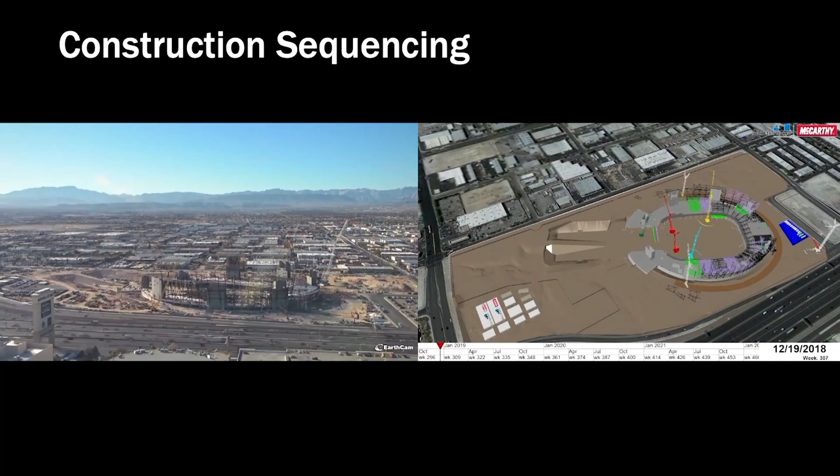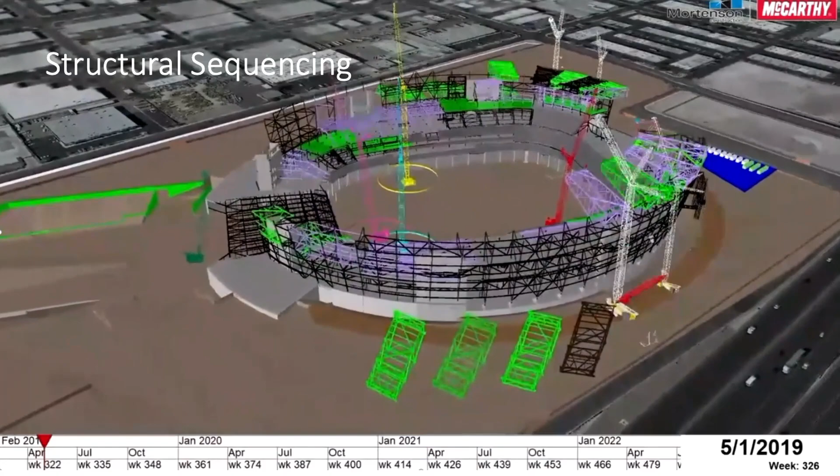So we blasted about 900,000 yards of dirt, and then started with two separate crews working clockwise and counterclockwise around the bowl for concrete. And then we followed that same path for steel. And then we'll go to the next slide and take just a deeper look at the structural sequencing. So the green items that you can see on the screen is kind of the current activity in progress. Purple that follows next is if there's another activity in that same area. So an example, green would be erection, and then purple would be steel detailing. And then it grays out when the activity is complete.

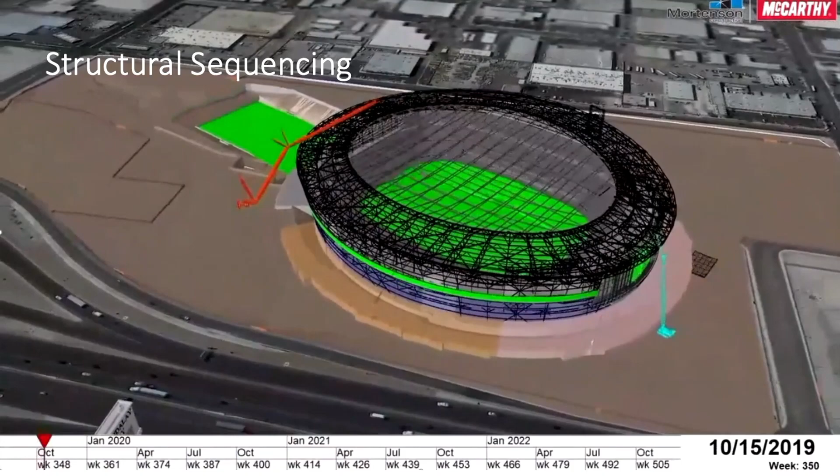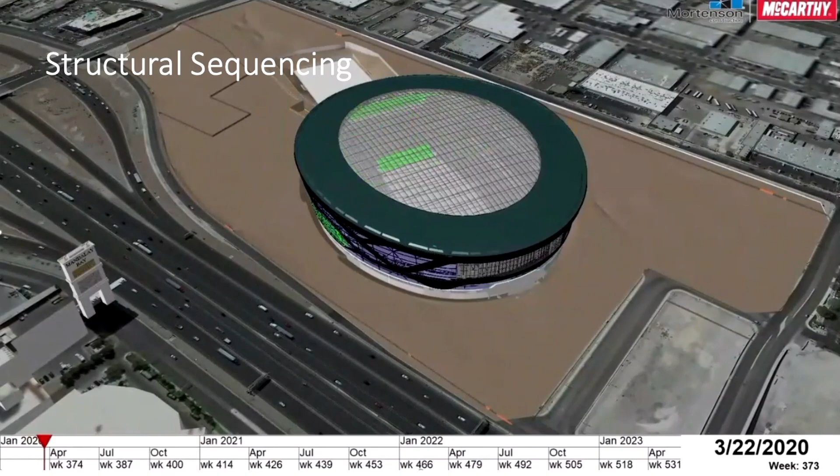And so we're able to use this to look at crane roads, swing radiuses, all of that to make sure that we're not trade stacking, make sure we're keeping people in a safe working spot. And I think you can start to get a feel for just how many activities we're working concurrently. So our construction schedule when we finished construction had over 45,000 activities in it. And so a pretty monumental effort to get the structure completed.

And so wanted to chat a little bit about the challenges. So we call this beating the house. So from 2017 to 2020 was a bit of a tumultuous time in the United States. So right off the bat, we started the global tariff wars. So we were really fortunate that the majority of our steel procurement was done ahead of those global tariff wars. But we did deal with the tariffs for a lot of our trickle-down commodities, and so we saw pretty big impacts to mitigate in our mechanical scope of work specifically, as well as a few smaller trades.

Steel fabrication, our timeline was so quick that we had to utilize multiple fabricators across the United States. We'll dig into that in a minute. The cable net big lift, it was the first time Mortenson had ever performed such a feat, and it's not a terribly common selected choice in the US, and so there were just a lot of unknowns surrounding how the big lift was going to go, and it was absolutely critical for us

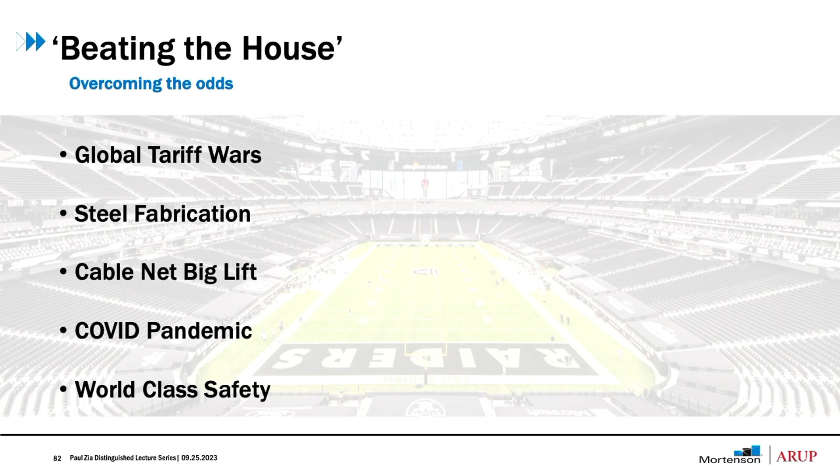because the way cable net structures come together is all of the cables were laid down in the bowl, kind of woven together like a tapestry, and you had your top strands and your bottom strands, and they wait there. And then as soon as the compression ring was done, it was time to start the big lift. And so you do a very cool sequence of lifting operations, and the entire roof is lifted slowly over the course of several weeks. And it was critical for us to be able to get that off the ground because we only had a 2-week period of time in our schedule to be able to set our lower bowl precast.

As we entered 2020, we got hit with the COVID pandemic, and so a lot of uncertainty. I don't know if you all remember, but the Vegas Strip actually shut down for COVID. All the casinos closed down, which is the first time that's ever happened since Vegas in modern day became what it is. And we rode back and forth on, is the job site shutting down, is it not, all the way through, but ultimately it remained open through the entirety of COVID until our finish line in

July. And we were faced with bringing 2,000 people to work every day because naturally COVID hit right when we were at our peak workforce. So we had to bring 2,000 people to work every day. We had to get what is inherently an industry of teamwork and close collaboration, 6 feet separated.

Our primary messaging for safety and for what's going on site happens in our morning meeting. That was all of a sudden scrapped because there wasn't a way to do it safely with 2,000 people. We didn't have an area big enough to keep people 6 feet separated. And so a lot of challenges, obviously. That was early pandemic days, and so we were seeing changing recommendations almost on an hourly basis. So we're masking, we're not masking, we're social distancing, we're not social distancing. And so just keeping up with that.

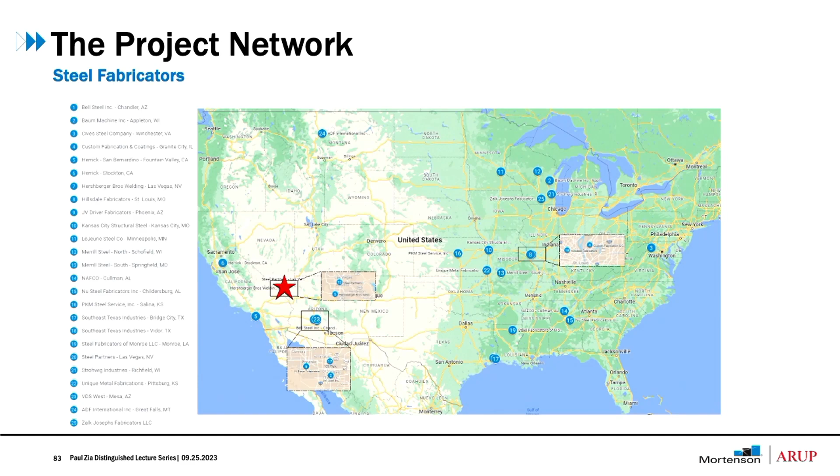We had a local staging yard, and we had sometimes upwards of 100 trailers of steel waiting to go on site. And then I wanted to briefly talk about our design assist team. It really did span the globe. We had contractors from all over the United States working on this project, and we had worldwide trade partners as well. Our cable net system and some of our steel came from Europe. And the ETFE, which is that translucent material for the roof, is also out of Germany.

And then ultimately, what did those results look like? Because at the end of the day, if you can't achieve the right results from a project, it really doesn't feel that great turning it over. And so we were able to achieve over the project goals in every single category, which is something we were really proud of. There was some legislation, with it being a partially publicly funded project, that set some goals.

There's a 15% goal of small business enterprises, and we were able to achieve 23%. The criteria for those businesses was a bit different than what we're typically used to seeing, but it had to be a small business whose primary licensing was in the state of Nevada.

We awarded to many diverse firms, so 63% of the firms that we awarded work to were considered diverse firms, and it was 34 different firms that performed over $70 million of the work, and 70% of the work was from Nevada-based entities, which was very important to our customer.

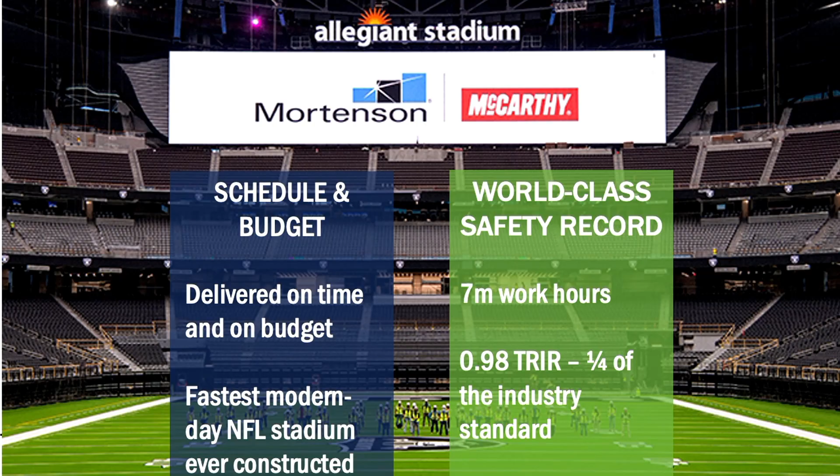And so just to wrap up, Frank and I are both very proud. Allegiant Stadium was delivered one day early and under budget, and it is the fastest modern day NFL stadium ever constructed. We did work about 7 million work hours, put 12,000 people through orientation, and again, we're able to achieve absolutely world-class safety performance on that job, ultimately wrapping up on July 30th and into just a landmark project for the area. And so with that, we'd like to open the floor if anybody's got any questions.

Who was the licensed engineer that sealed all the structural components? Was that you? It wasn't me. It was the principal in charge, Atila Zekioglu, who was with Arup at that time.

Hey there, thanks for the great talk. With most of the procurement being done so early on in the project and with the design assist approach, how did you manage to keep costs under control and under budget? Yeah, absolutely. So we engaged our trade partners in design assist contracts. And so I would say that that varies. Your typical contract with a trade partner would be, $10 million, and I'm going to provide 100 toilets and 4 showers, and the list goes on.

And our contracts were written very differently. It was that they were going to provide the program required for an NFL stadium, and so we had phenomenal partners, and we worked tirelessly with them in order to optimize exactly what we were buying, making sure that it was the very best buy that we could get, and then if there were ideas that our trade partners have,